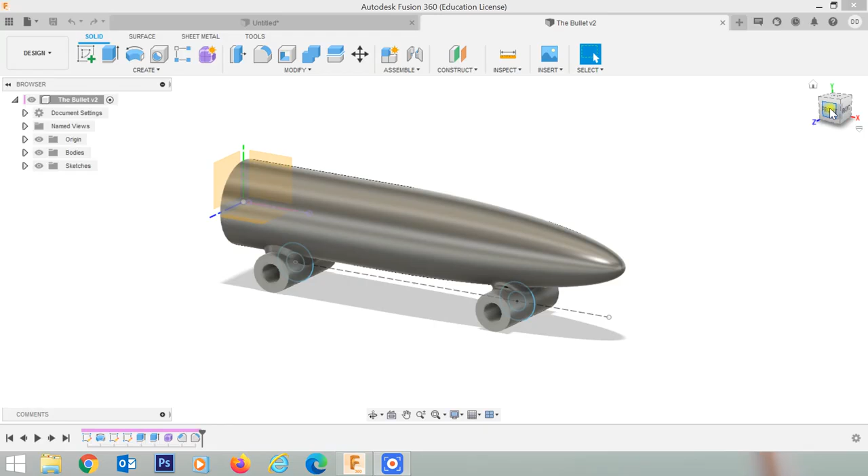Okay, well, welcome to this little tutorial. It's designed to help you create a simple bullet car. I call it a bullet car because it looks like a bullet, and it's designed to run off a CO2 gas cylinder, which fits inside that hole.

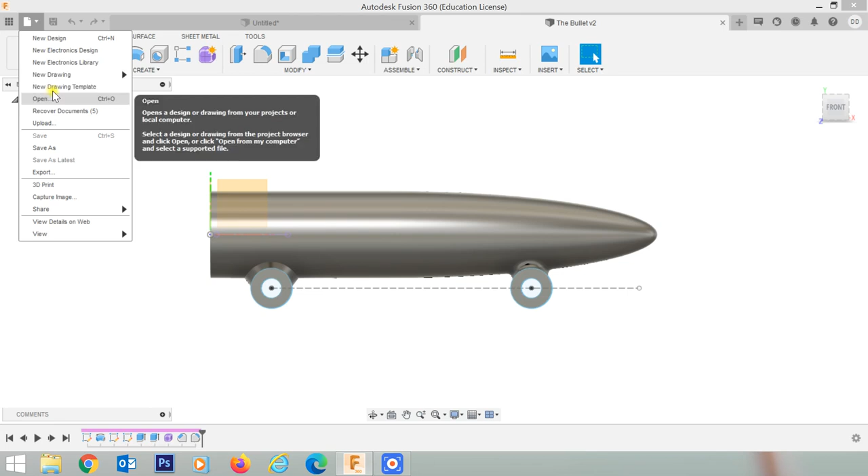And I'm not going to spend a lot of time talking about the dimensions and the design. That part of it we'll discuss later, but this is purely how to get started with Fusion. So that's what we're about to do. So I'm going to start a new file. So I'll go from File here and create a new design up the top,

and at the moment it's called Untitled, and I want to call it something, so I'll save it, and it will be queued to give a name. I'll call it Bullet 2, and at the moment it's located on my desktop, but I can choose to locate it anywhere else that I want. And so I'm going to click that down arrow.

I've got a bunch of different folders here, and inside each I can have a subfolder. So Desk 1 here, that folder has all of these subfolders. If I want to create a new project, I can create a new project or a new folder within each of these. So I'm going to save it in, I think I've got F1 cars here, and I'm going to save it in there, in that folder, F1. There it is.

Okay, so the screen is blank at the moment. The first thing to do is create a sketch. So create down here, sketch. Now that's a 2D sketch, and straight away you'll find that these planes appear. And if they don't, click this button on the side here, which enables visibility for your origin.

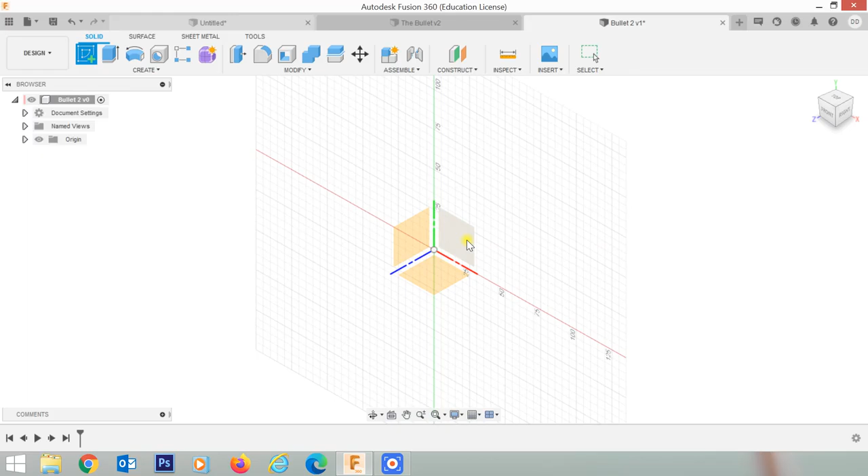Your origin is the center of the universe. It's like it's divided up in 3 dimensions, 3 planes, and there it is. If you uncheck it, it disappears, but check it and it's on. So let's create a sketch. So create sketch, and then we've got to select a plane to draw on. So I'm going to select this plane. It doesn't matter which plane you select.

And now I strongly suggest that you start drawing from the center of the universe. In this case, I'm going to draw a profile. Now notice that up here has appeared a sketch palette. We'll use that later on, but you can drag it around with your mouse if it gets in the way. So at this point in time, the first shape that we're going to create in our 2D sketch, which we'll later make 3D, is going to be a rectangle.

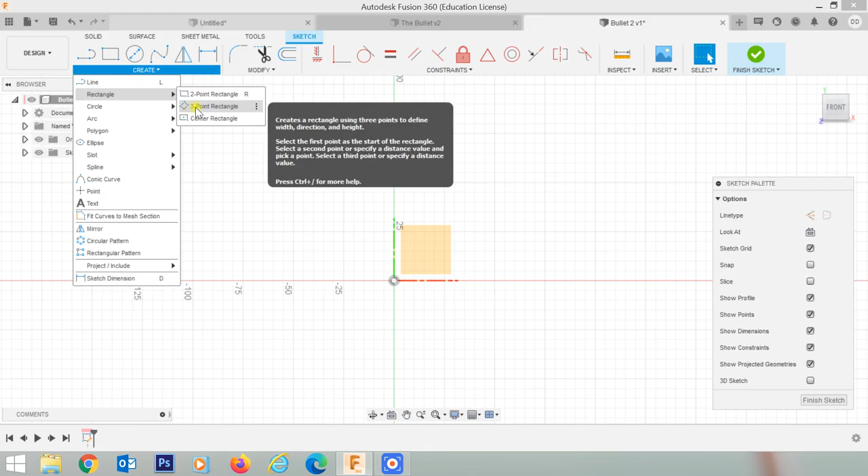So I'll create a rectangle, and in this case I'm going to create a 2-point rectangle. Now there's different types of rectangles. Click on here, you'll see 2-point, 3-point, center point rectangle. Let's just go for a 2-point rectangle like that. Start it from the center here and draw it out.

Now I happen to know I want my object to be 130 millimeters long, and at the moment I'm being given the width. Now the width, I'm choosing to make that width 27 millimeters. So because I'm only going to draw half of this circle, or half of the object, or actually I'm going to draw a quarter of it, you'll see why in a minute.

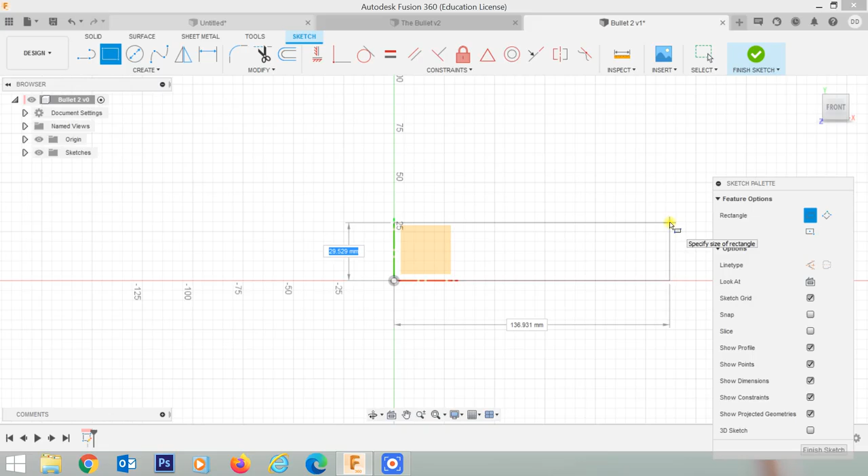I'm going to halve that 27 millimeters outer diameter, which is this diameter over here. So the diameter of this circle here, that's 27. I'm going to halve it because I want this distance from here to here. So half of 27 is going to be 13.5.

So let's draw my rectangle again. I happen to have lost it there. So we'll create a rectangle again. From the center, drag it out holding the mouse button down, left mouse button. Release the left mouse button, and I'm now going to enter in a value here for the height,

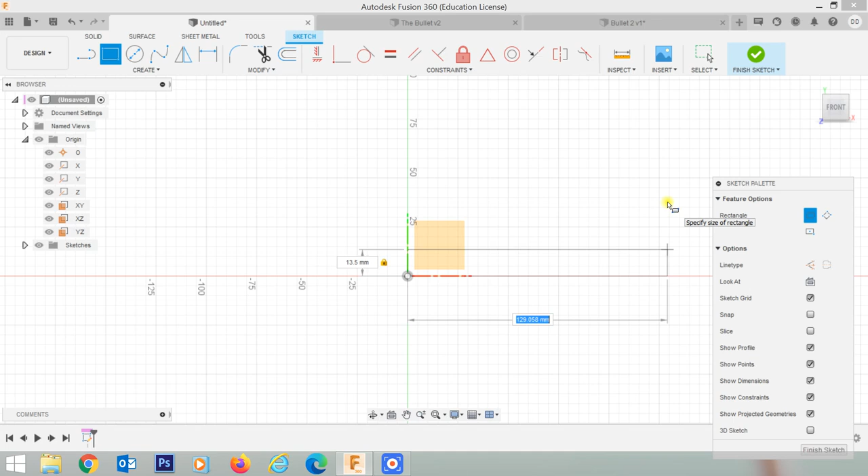and that'll be 13.5 millimeters. Now if I hit the tab button, I go to my next dimension, which I want to be 130, which is the full length of the object. Hit enter, and I've got that rectangle that you just saw, and I've got the specific dimensions that I wanted.

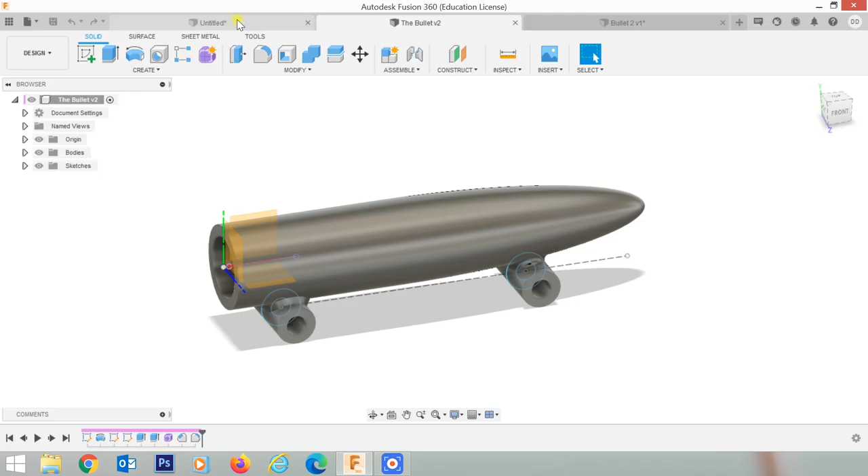Okay, now the next thing is, inside this circle, the bullet thing, there is a cavity which is 50 millimeters in length and 19 millimeters in diameter. So I'm going to create half of that. I'll create another rectangle here and drag it out, and this time I want it to be 50 millimeters long, but I only want it to be half of 19.

The radius of that circle is half of 19. 19 is the diameter, so half of 19 is going to be... 9.5. Hit the tab button again.

Now that gives me the long ways direction, which I want to be 50 millimeters. So I'm going to hit enter for 50 millimeters. And I've got another little rectangle inside there. That's pretty cool, I like that. You'll see why it's useful to do this in a minute.

Now the next thing that I want to do is create an elliptical shape to get a nice curve down here. So the next thing I'll do is create a kind of circle. No, I don't really want a circle, I want an ellipse. There's the ellipse.

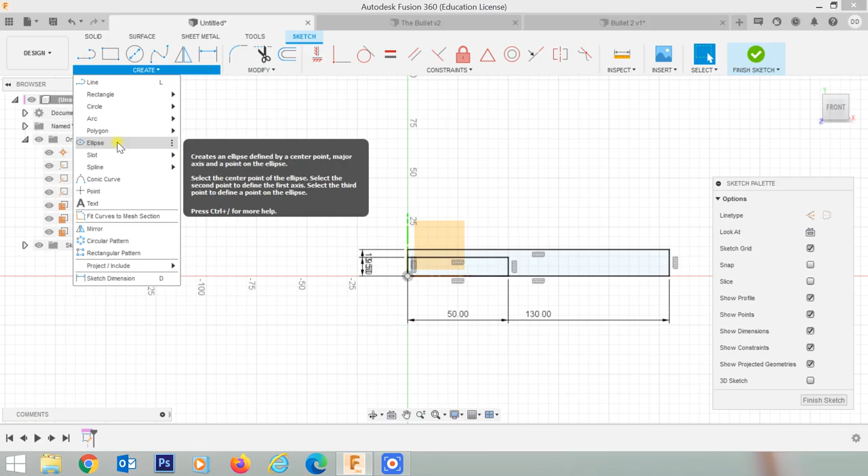So click on ellipse. Now, the thing you need to know about ellipses is that they have a center, just like a circle does, and then they have a minor axis, which I'm clicking here, and a major axis, which I'm dragging out my mouse to find.

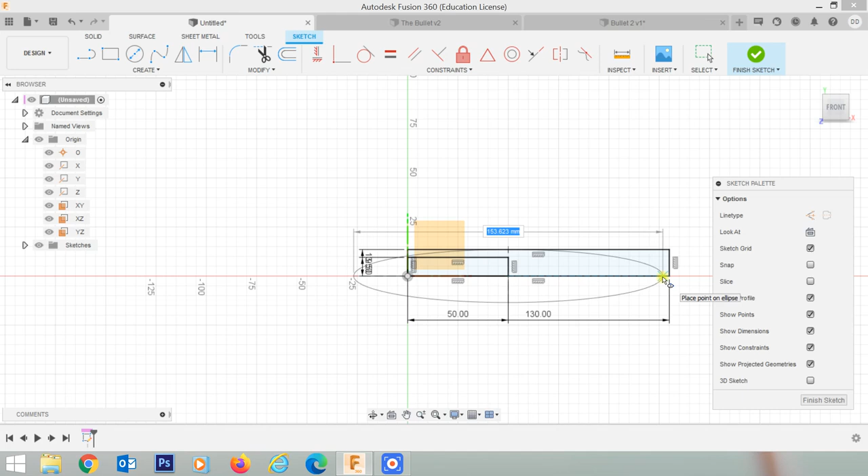Now I'm going to do something here just to show you. I'm going to click it short of that line where I want it to go, because I want to show you how to use constraints. This section up here is called constraints - they force your lines into certain areas. You see this section here, it's called a tangent constraint.

So if I click on tangent constraint now, and I select a circle or a rounded shape, and then I select a line that I want it to become tangent to, click the line, and you see how it just touches and becomes a tangent? Now that's really important for us.

So the other thing is I want this line here to be tangent to that major or wide arc of the ellipse. I've still got tangency on at the top here because it's still highlighted. Click on the line, click on the ellipse, and it'll be tangent to. I just want to make sure of that. I'll show you why. Alright.

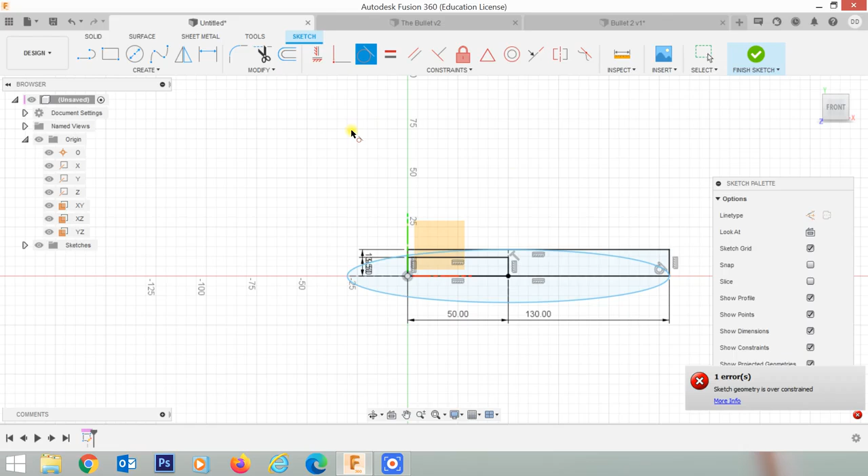Now, if I hit the escape key, I get out of that tangent constraint. Now, this next section - I've just about created what I want to do. Almost done, and I'm going to show you this part here, which is a nice bit.

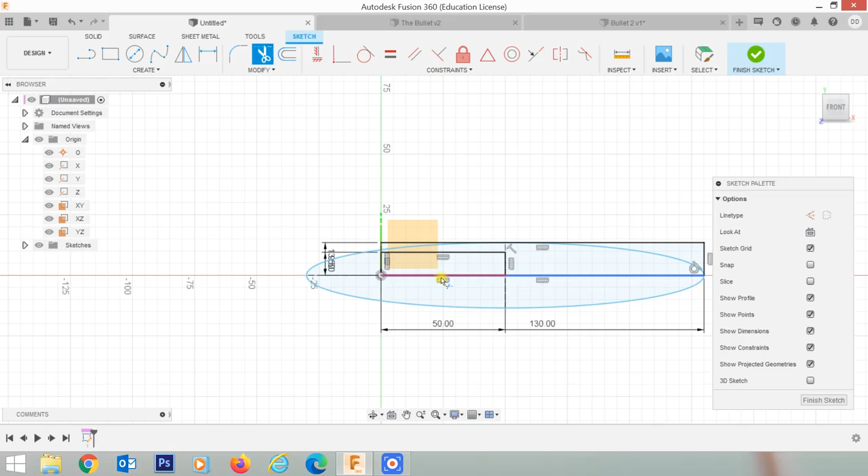Use that little trim function here, which has got a set of scissors. Left click on it to highlight it. Now you're going to trim off little lines. So I don't want that line, I'm going to click on it and it disappears.

Now if you find another line sitting underneath it, because I've got two rectangles on top of each other, click a second time and you see how that line completely disappears. Now I've got a warning here that dimensions were removed, so that may give us trouble, but we'll find out.

See how that line highlights? I just want that line highlighted now, and I'm going to double click on it again. Good, so now I've got a shape that's starting to look right.

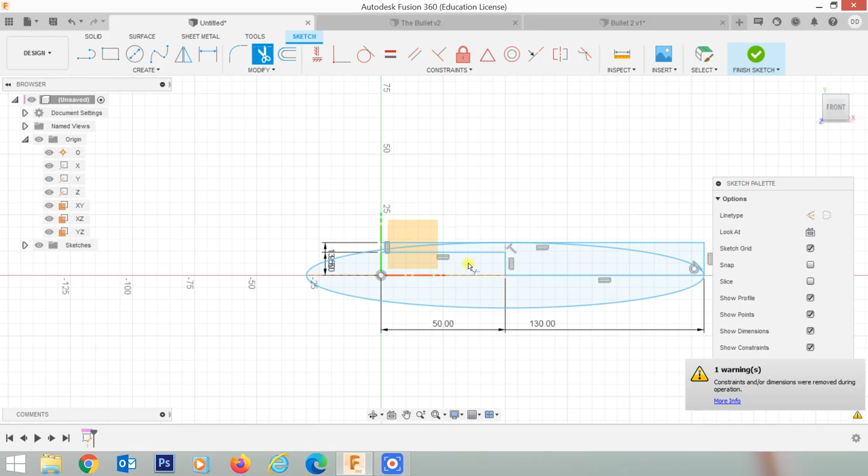Now I don't want this particular section part of the ellipse here, I'm going to get rid of it - that one. And I don't want this part of the ellipse here either. So I'm highlighting it and left clicking it because I'm still in the trim function.

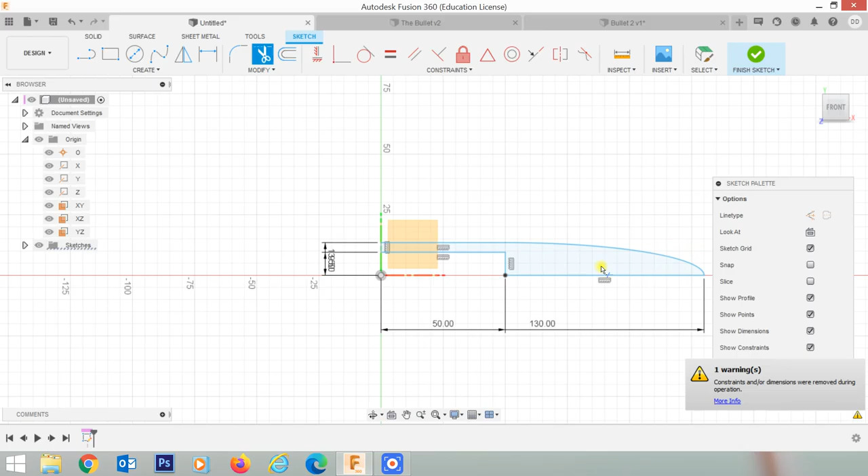I'm getting closer to the shape that I want. Don't want that line - click on it because I'm still in trim function. Don't want that line. Now I've got a bounded shape like this, and by the way, if you see it getting bigger or smaller, I'm just scrolling my middle mouse button to make it bigger or smaller.

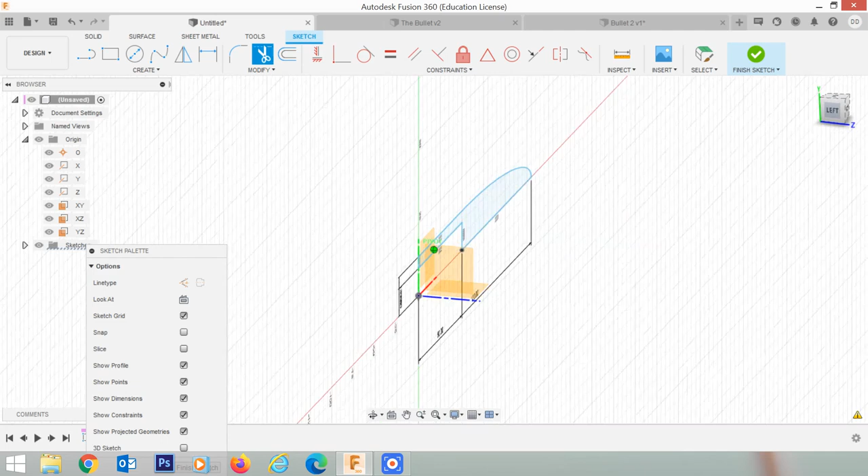Okay, so I've got a bounded shape. Now I'm going to do something a little different. Just to look at it in 3 dimensions, I'm dragging the box by holding my left mouse button down here, and I can move this line. You see, it's a 2D sketch, still a 2D sketch.

I want to do one more thing. I'm going to create an axis along here because I want to revolve this whole shape about an axis. So to do that, I'm going to create a line. There's the line function. I'm going to click on that, but when I create a line, I want a particular type.

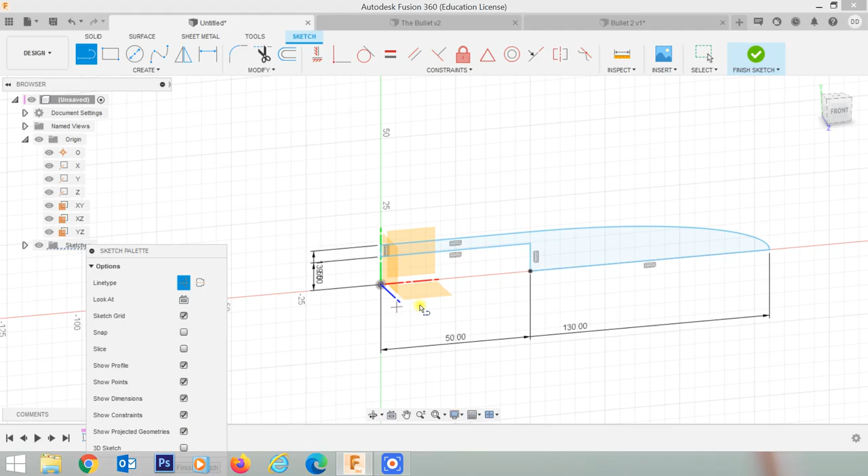Just click on line here and it should give you a general line. But now I'm going to create a thing called a construction line. See that? Line type construction. Left click on that and that gives you a line which has dots on it. It's not really a line that's going to show up in your drawing, but it nonetheless acts as one. By the way, if it sticks on you like this and you want to get rid of it, just right mouse click and click OK, and your line exists and you unstick yourself from that anchor point.

That's going to act as an axis for us to spin this shape about. See that shape that I've highlighted? I'm just hovering my mouse and you see it highlights. I'm going to revolve that shape around that axis.

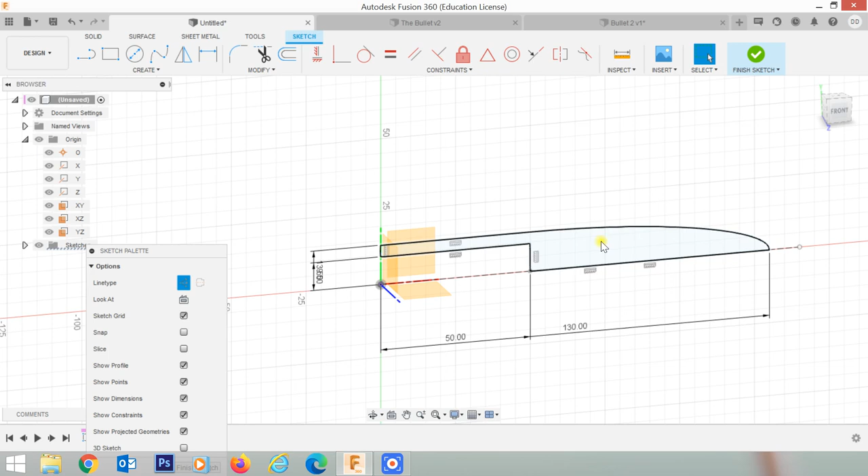Now to do that, we might need to do a solid. So click on the solid tab over here, and under the create area, the solid, we should find revolve. There it is. So with the revolve, you can see while looking at that drawing, you've got a 2D profile that gets spun around a central axis and creates a 3D shape.

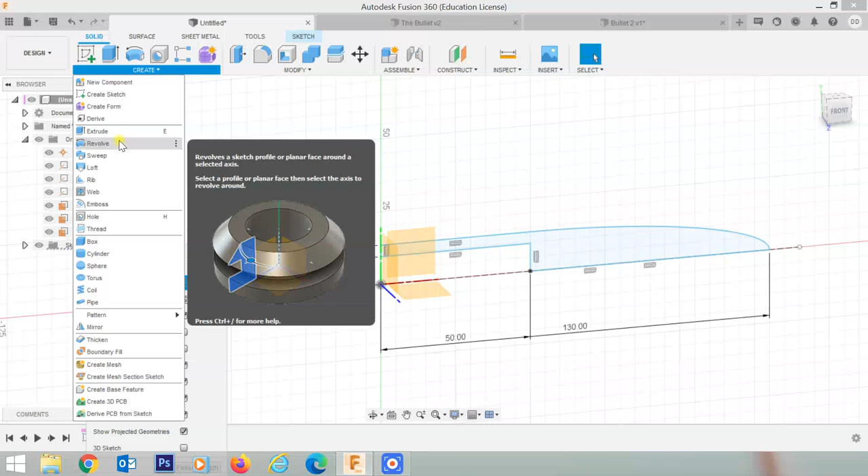So we're going to do something similar. We're going to click revolve. A little dialog box pops up here. There it is. Now you're asked what profile do you want to revolve. That's the first thing. This is automatically selected, see how it's highlighted?

Now, if there was another profile available, you'd have to actually select it. But because there's only one profile, Fusion knows that's the only one you can use, so it's selected it automatically and it goes that blue color. Now the next thing you need to specify is click on this button where it says select axis. Fusion wants to know, where do we spin it about? We're going to spin it about this axis, about that axis.

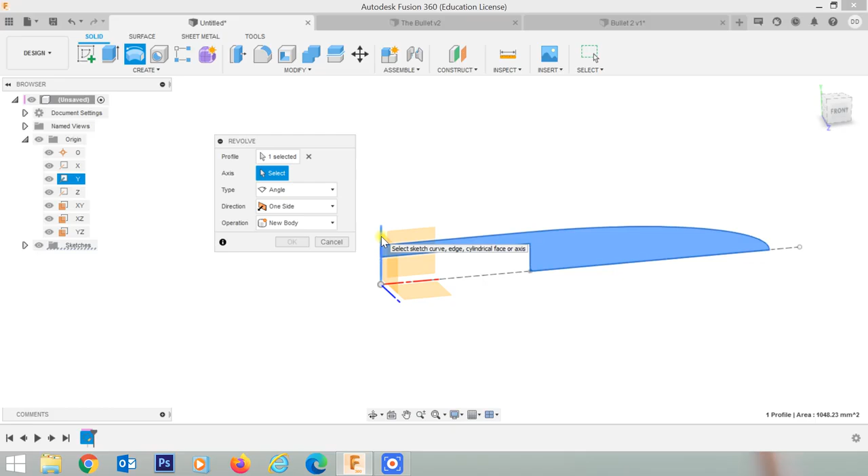I'll show you in a minute. If we spin it about this axis, like that, you get this big flat shape, right? It's a pancake. We don't want that. And it's created a new body, and it's gone around 360 degrees, so I don't want that shape.

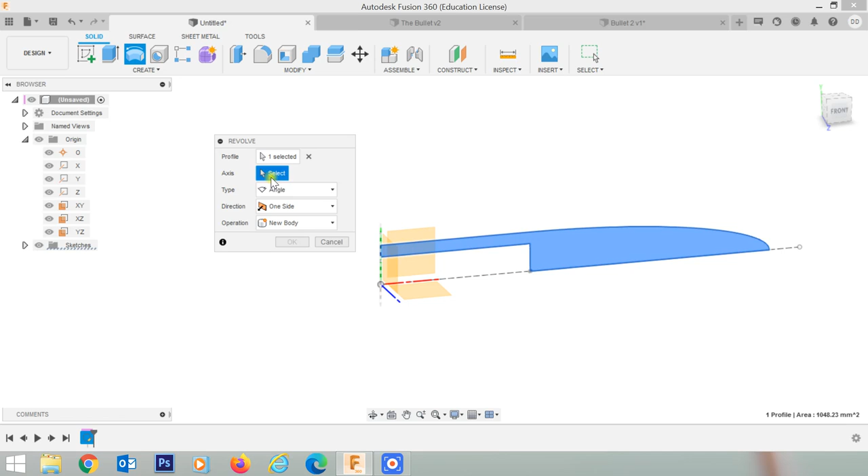So I'm going to change it again by deleting that axis. And this time I'm going to select, for axis, this line here. And there's my result straight away. You see how it spun that shape out to create a 360 degree shape like that? That was pretty easy, wasn't it?

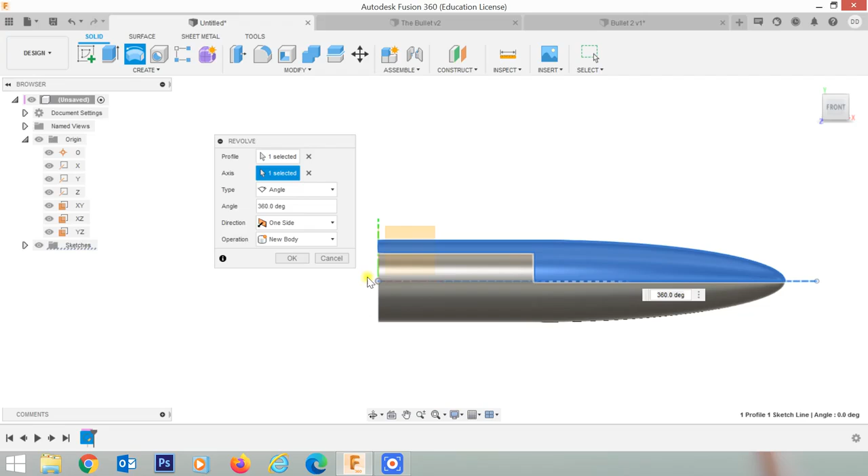Okay, yeah, I agree, so I'm a bit lost. If I get a bit lost, just go back, click on the front, and there you are at the front again. Now click OK if you want to accept that, which you do, so you're happy with that.

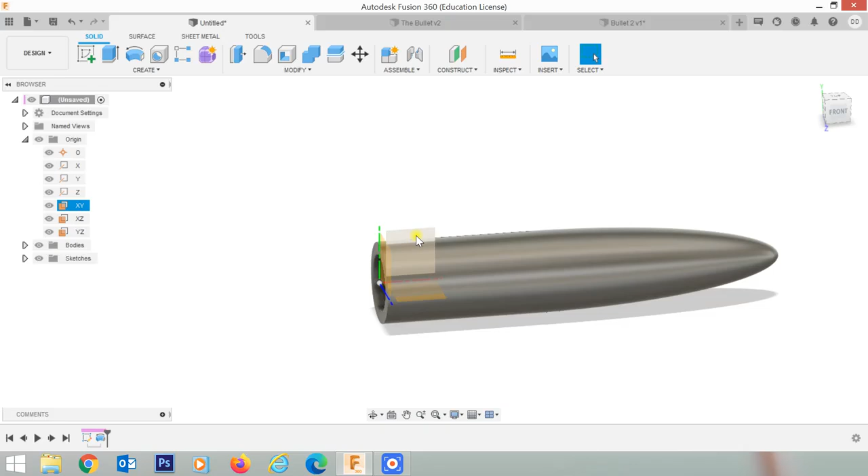Now the next thing is I'm going to create some wheel sections for it. If I get lost again, just up and down all over the place, click front, and there you go. Now again, I'm going to do a sketch to create my wheel patterns, but I want the sketch to be on the mid plane. That's the plane that divides the center of the object. You see how I've made it on a mid plane? That's the mid plane there.

So let's create another sketch, this time on the mid plane, right there. I'll show you why in a minute. Okay, so now we're actually looking at the mid plane, believe it or not. Now, because it doesn't look obvious, there's a little fancy thing you can do here called slice.

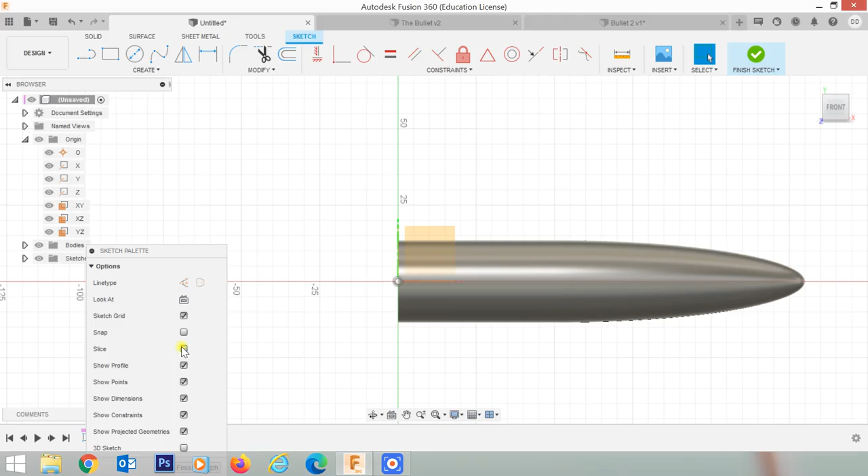See that down there inside the sketch palette? You click slice, and it'll slice the object along that plane. So now you can actually see what you're drawing at. See that? So you just slice the object like you slice an apple, and now you're looking at the face that's in front of you.

Now we're going to start to align up some wheels. I've made a decision on this, and I'm going to create my wheel axles to be a distance from the center line here. I want it to be around about 17 millimeters from that center line that goes right through the gas canister hole, so I've got to come down about 17 millimeters.

I'm going to use this construction line again, and I'll show you why in a minute. So let's create a line. We'll go to create, line, and I'm going to select construction line.

I'm just going to draw a random line because we're going to dimension this and get it accurate. I'm going to make it parallel to that surface, and you can see if it goes up or down. It should say 0 degrees in the middle there, which means the line is parallel with this one. You can hit escape, or right click and hit OK, and your line's there.

Now I want this line to be 17 millimeters from this central axis, so I'm going to use my dimension tool. There it is, sketch dimension. I click on one line that I want a dimension from, left mouse button click, do the same on the bottom, and drag across.

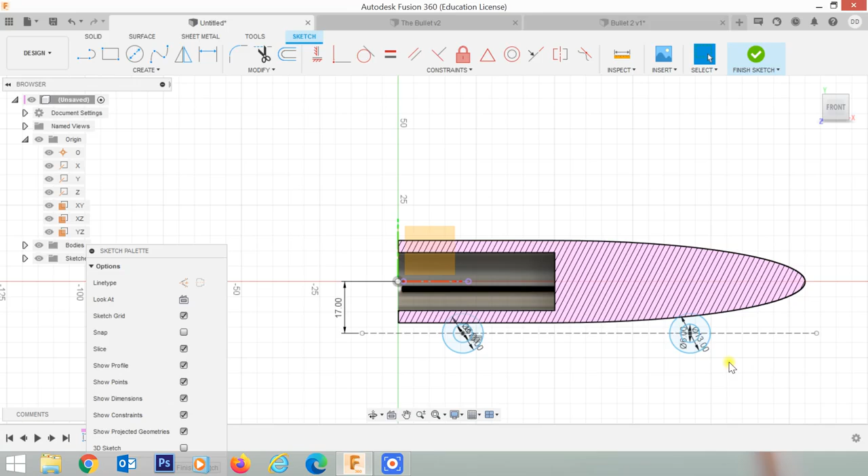Alright, do the same deal on the next one, on the other axle, front axle - 6 millimeters. Hit enter, beautiful, and do another line. Click on the circle again, wait till I hover over that midpoint so it locks in, and drag out - this time I want that to be 13 millimeters. Hit enter. Beautiful. They're still in contact with each other - you'll see why I want that in a minute.

Now what I'm going to do, and I'll show you a little bit here in 3D what's going to happen. So we've drawn this center line, and I'm going to extrude outwards to create my cylindrical shape that holds my wheels from either side.

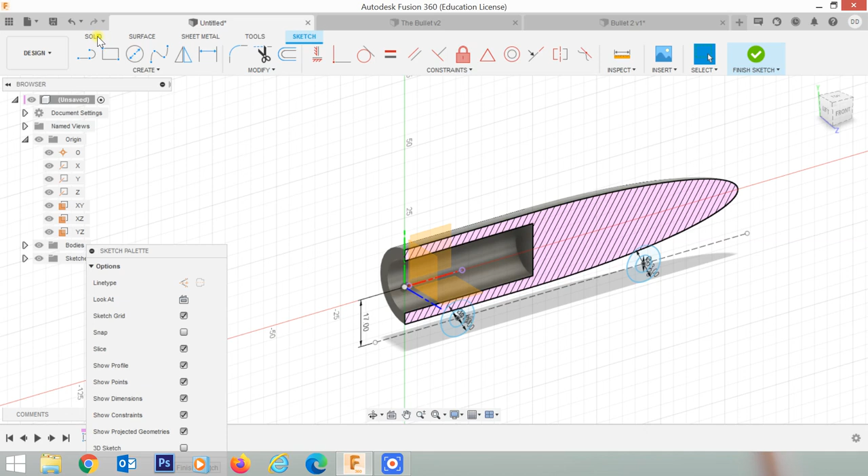To do that, I'm going to hit the Solid tab. See up here, the Solid tab? I've been using the sketch function, but I can go solid now, and that's the extrude button. I click on that, and Fusion asks, okay, you want to extrude? Here's all the information I need. First thing I need is a profile. What shape are you going to extrude?

If I hover over this profile and left mouse button click, it highlights. See how the arrow pulls out? I can grab that arrow and it'll drag out in one direction, but I don't want that. I want it to go on both sides. I want to extrude symmetrically, the same distance on both sides. So now it's going to extrude on both sides. That's why I chose the center plane, because I want it evenly extruding outwards.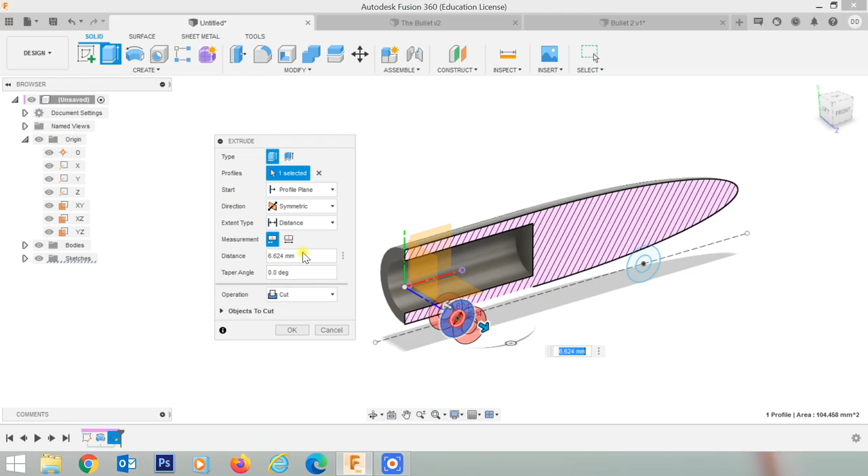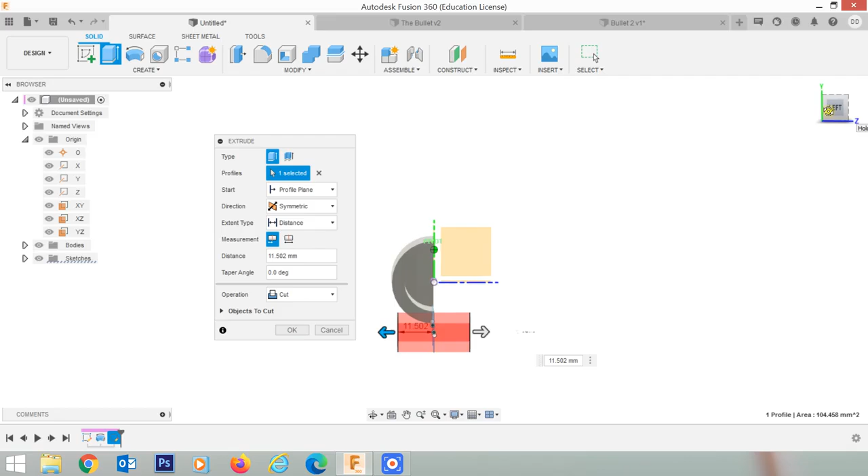So how much do I want it? There's a distance down here, and I can drag it, have a look, and eyeball it. But the reality is I've got to put some pretty big wheels on here, so I'll drag this out until it comes just beyond the top of that edge, so I know my wheels aren't going to lock in and interfere, since my wheels are 32 millimeters in diameter, the standard size. I'll go that distance, and Fusion tells me it's around 11.5, so I'll just make it 11.5 to make it even.

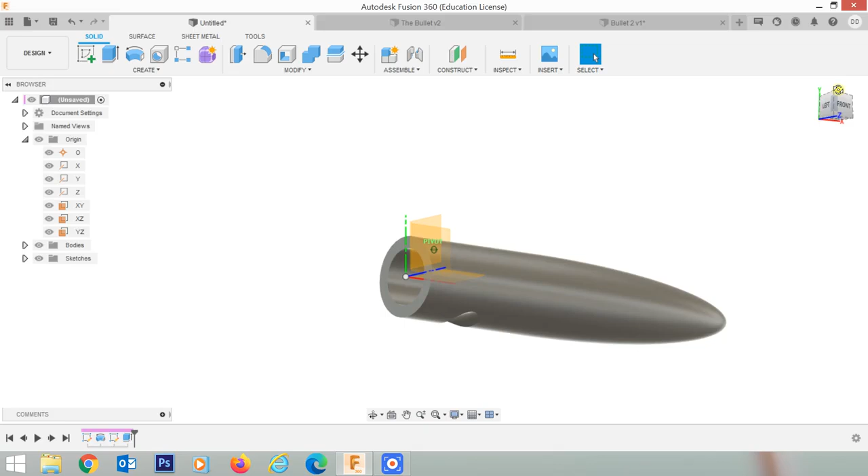Hit OK. See how it's disappeared like that? I can't see anything. I wonder why that is. Well, probably because I left out a single function. You can see under here, yeah, it's just got a hole there. What's the problem? Down here is the record of what I've been doing. I've done the revolve, done the sketch, and now here's my extrude.

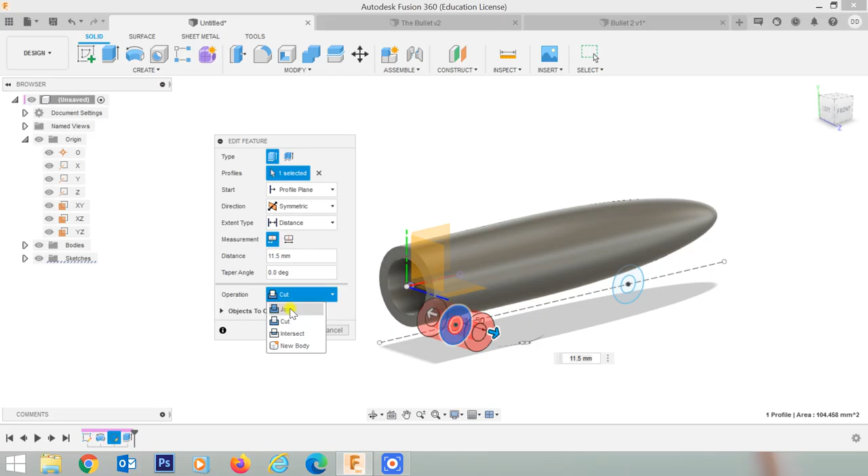If I right click on that and go up to edit feature, I can go back and redo this. And what did I do? Look at the dummy that I am. I didn't choose to make a body, I chose to cut. So instead of creating a new body, this thing just cut out that shape. Well, I don't want that, so I'll put join in there, and now you'll see it'll work pretty well.

So there's my axle all set up like that, yeah? Okay, so next thing is, let's do the same thing on the other side. If I wanted to do that, I need to find this other thing. See how I can't see anymore where that sketch was, with that circle around here?

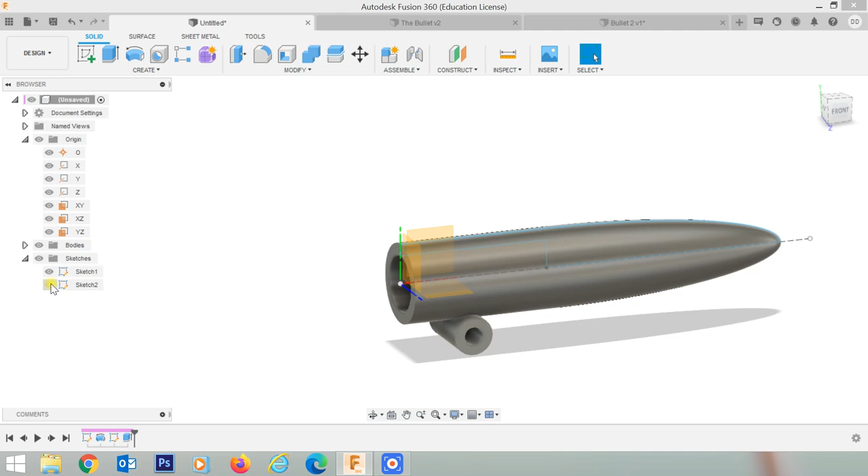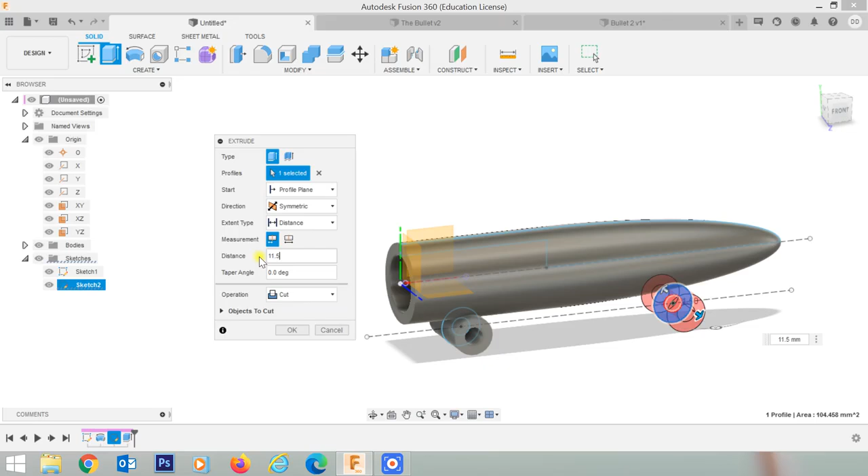Most likely it's because on sketches, if I click sketches, they're not showing. So if I want to highlight them, I just click that little eye and the sketches pop out. See that? Now I can see them. Now I'm in a position to hit the extrude button, select that sketch, and do exactly the same thing I did before. Go from both sides, make it symmetric. The distance, if you recall, was 11.5 millimeters on either side. And I don't want to cut, I want to join things together. I click OK, and we're done.

So now the car's almost complete. There's only one thing left, and that is we've got a bit of a weakness here. You see, there's not much joining on this front part to the top, to the bullet section. So let's place a nice little chamfer on that area. If I highlight it, you'll notice the shape that I want to chamfer.

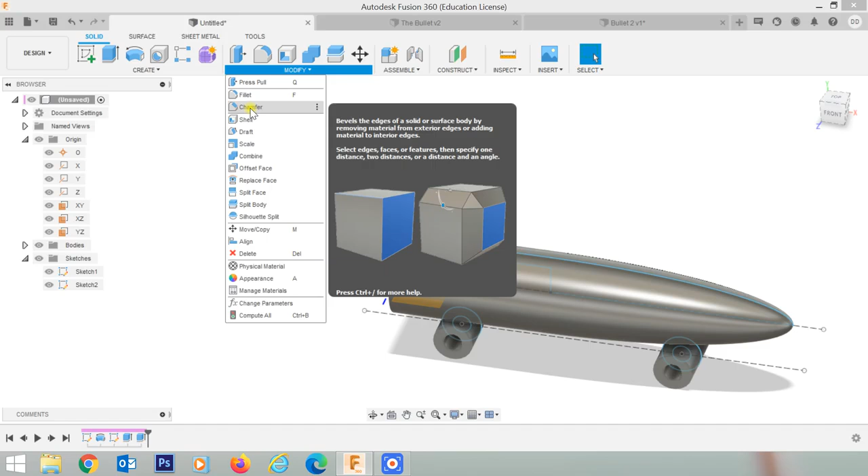See it? So I'll go to Modify, the modify toolbar area, and I'm going to create a chamfer for you. So chamfer, you can see on that box, it's like a sloping surface.

And I click on chamfer, and Fusion says, fine, that's all good, but you got to tell me what surface you want to chamfer. Now comes the tricky bit. I've got to find the surface by hovering over. There it is, that's that one. Now, there's all sorts of other surfaces going on here, but I want that one. So I click that. And now I can drag this out, and you'll see the chamfer will start to get bigger. Can you see it growing there?

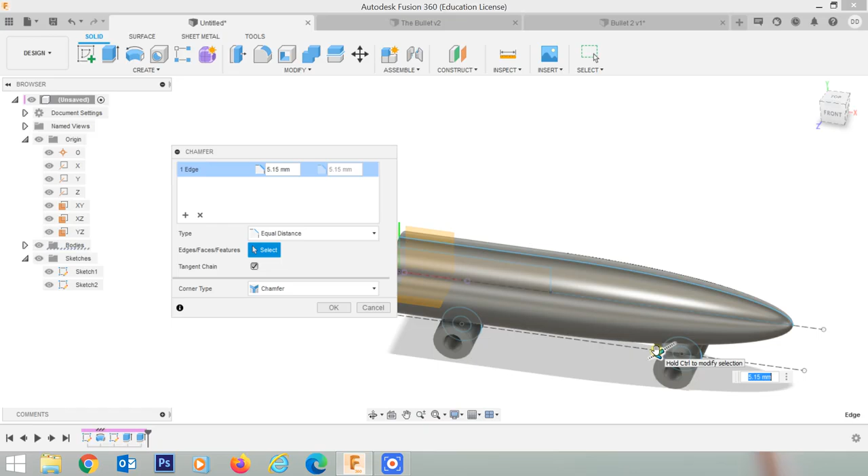I might make it a little bit bigger for us. Right, there it is. So I've got a pretty chunky chamfer there. That's going to make that pretty strong, right? I'm sure you'll agree that's not going to come off now. Now I can type a distance, or I can just drag it by hand. Dragging is kind of fun because you can see it grow and shrink. And I'll click OK. Now this time over here on this side, I'm going to do something a bit different.

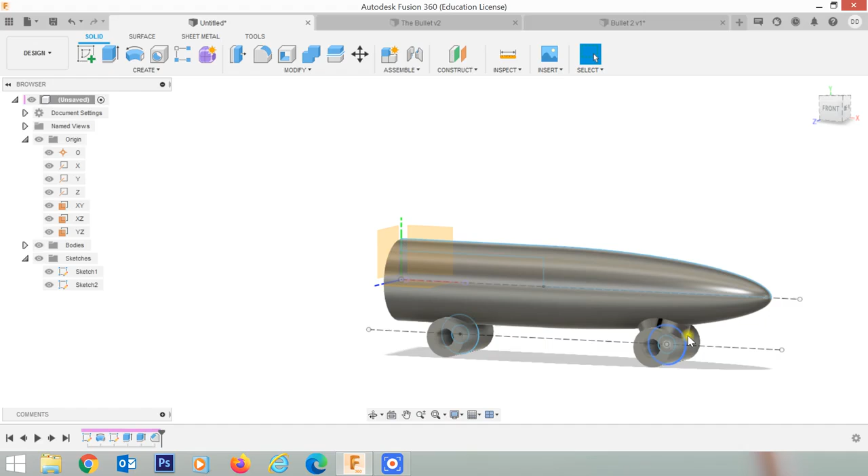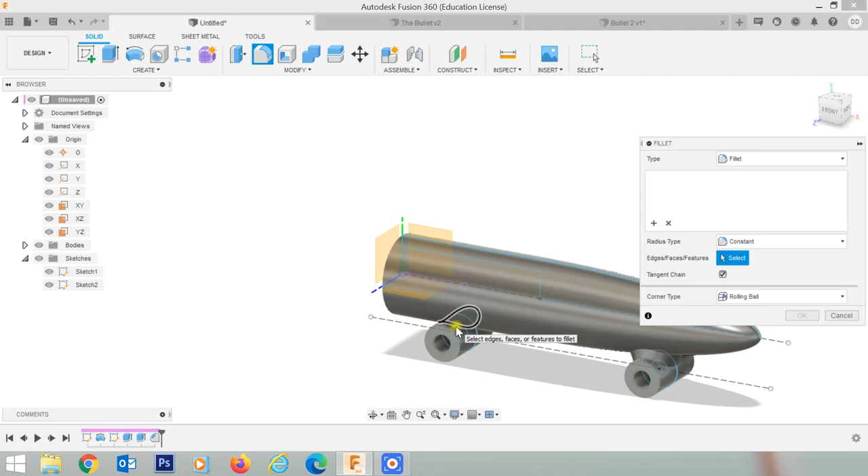So instead of using a chamfer, I'm going to show you a fillet. A fillet's kind of like a circular shape. Pretty handy, and it's lighter than a chamfer. So let's try here, and we'll go Modify, Fillet. Now again, Fusion wants to know from the dialog box it's a fillet function. So where is it? What's the shape? It's not that wheel. It's not that. There it is there. It's that intersection between the cylinder of the body of the bullet and the cylinder of the wheel housing.

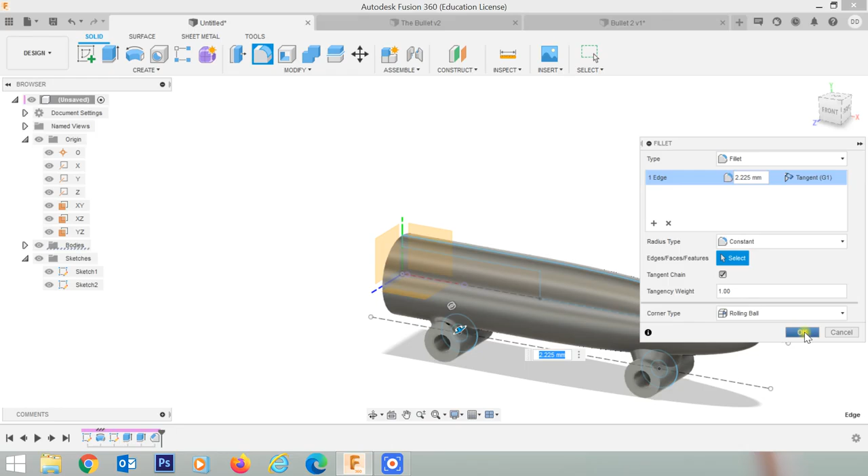So I'm going to drag that out a little bit, and you'll start to see. Now if you get a red line going on, that red line means it's got a problem. It means it can't do something. So go slow, take it easy, and then we'll click OK. And you'll find that there's the fillet sitting there nice and beautiful like that. It's almost like a welded surface, yeah? Just gives it some extra strength.

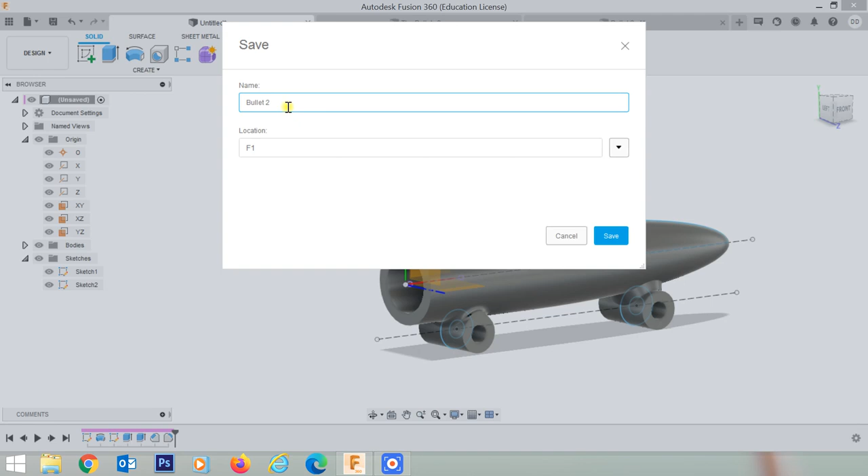Well folks, that's it. The bullet car has been made. Now you can save it. Save it like that. It'll say where do you want to save it, what do you want to call it. I'm going to call it Bullet 2, and I can choose a location. Now try and choose somewhere on one of your storage folders that you've got here. You can start a new one and call it, I don't know, My Cool Projects, and click OK, and there you've got a folder called My Cool Projects. Open up that folder and save it in there. It's under My Cool Projects, and it'll be there forever on the cloud.

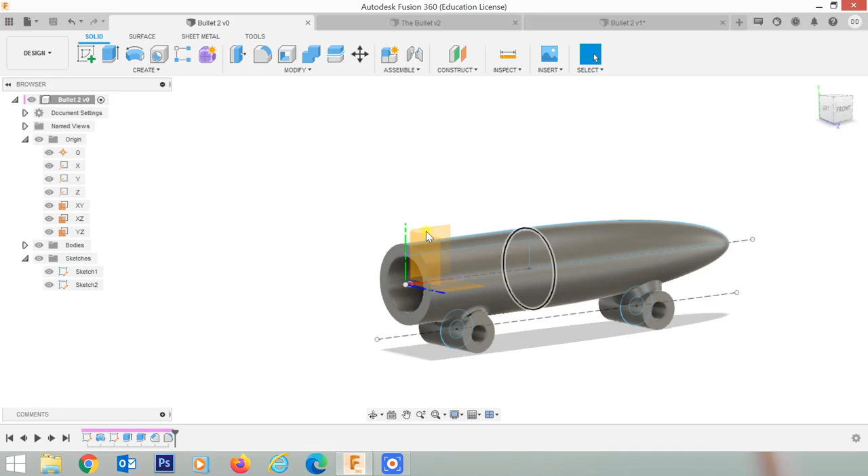Alright, now next thing to do is if you want to 3D print this, you're going to have to save it as a .stl file. Now the .stl file is pretty simple. You just hover over the object's name, which selects the whole object, right click, and then you save it as an STL. What's that look like? Click on it and you'll see. Now see how the shape's now been divided up into a mass of triangles. Don't play around with these too much. If you make the triangles too small, the 3D printer can't cope.

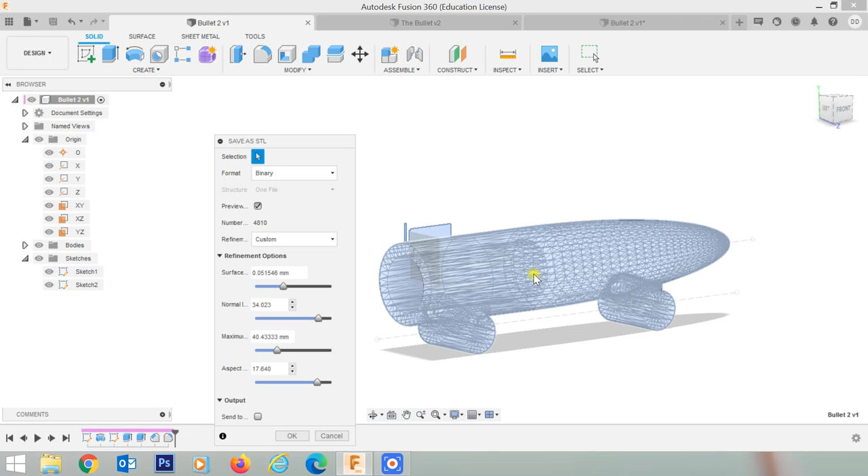Generally speaking, leave these settings as they are. If you wanted to, you can widen them, make them a bit bigger, and you'll see the triangles will start to change in size like that. So that'll make it a bit easier for it. You can play around depending on the detail that you want, but don't make the triangles too small. It will create you problems. So now you've got a shape that's been triangulated, see? And the 3D printer prints every one of those geometric shapes. It can't print curved surfaces, it only prints straight, so it's split up into a whole bunch of flat triangles that are so small that it looks like it's round.

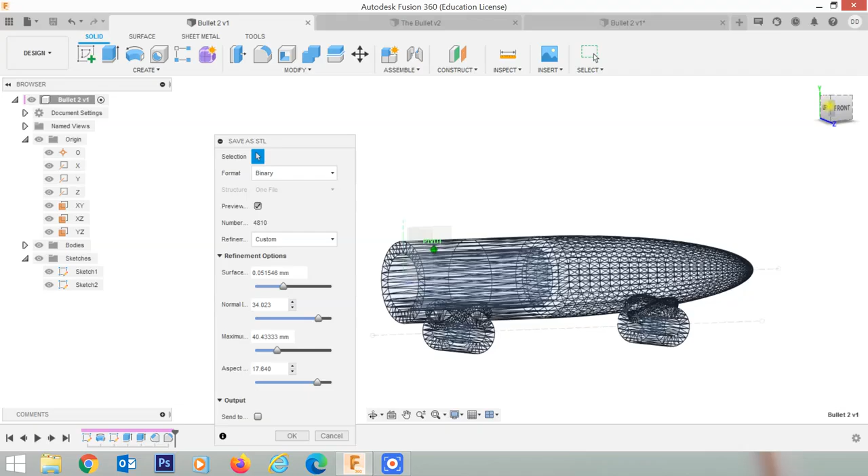Okay, you click OK with that down here, and then it's going to save it. And where do you want to save it? Well, on your desktop is fine, and it's got the suffix STL in it, and that's something you can feed into a slicer for your 3D printer. Alright, so click Save, and we are done.